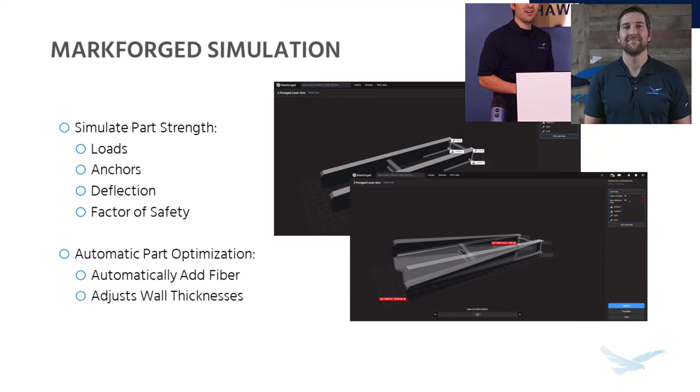So what essentially Markforged users have done in the past is print a part, test it, and find that maybe it's not strong enough, so it needs some additional material, or maybe it's too strong for its intended application, so it's just using excess material. So now with Markforged Simulation, you have a tool that will tell you before a part is even printed whether or not it's strong enough, and more importantly, it's going to give you options for adjusting print settings to meet your specific part requirements. Like you said, Kanan, I don't think I can stress enough how useful this software is and just how awesome its capabilities are.

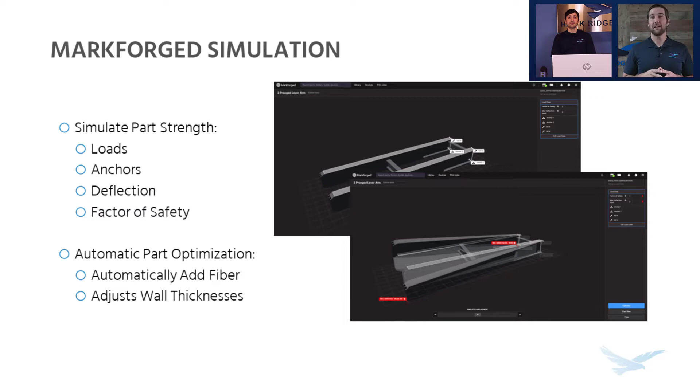That is pretty awesome. We can now predict how strong printed parts are, and not only that, but the software will also make changes to the part slice settings to make it strong enough for our intended applications. That's cool. I don't think I've seen that before anywhere else. And I know a few customers in particular who are going to be pumped for this new capability. So Jesse, can you tell us more details about how this software works, who will it be offered to, and maybe something about how our viewers can get their hands on it?

Yeah, absolutely. So at the moment, Markforged Simulation is a linear elastic solver, which essentially means it's going to predict how a 3D printed part will perform up until the point that it breaks, yields, or fails in some other way. And right now it works with both Onyx only parts and Onyx plus carbon fiber reinforcement. And what that means is users that have any of the Markforged plastic printers are going to be able to take advantage of simulation in one form or another.

And this one's going to be a fun statement that I probably won't get to make very often in my career, but as of the posting of this video on our YouTube channel, Markforged Simulation is live, and users can take advantage of it right now as part of a free trial that Markforged is going to run through April of 2023. So users have plenty of time to take advantage of it and simulate their parts. Hey, you gotta love those free trials.

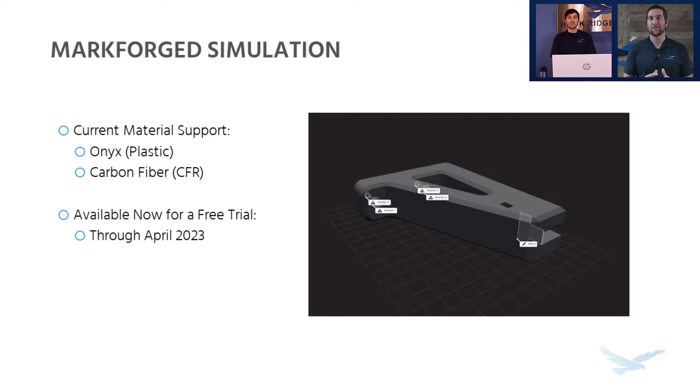So how can users access the actual simulation tool? Does it work with the current Eiger software, or is it a separate download? Yep, so since the Eiger slicer is all online, there's no need for software installs or any sort of updates. Simulation will work with all accounts, and it doesn't even matter how long you've had your account for.

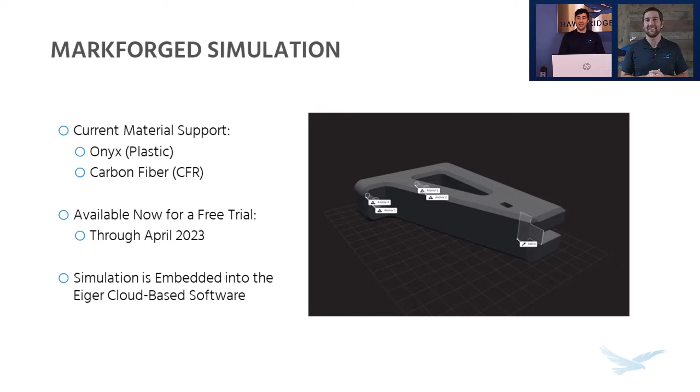So we do happen to have access to Markforged Simulation right now, and we've been testing it out. And so Jesse, could you give us a demo of the simulation software so our viewers can see how it works? Absolutely. Let's go ahead and jump right on into it so we can start showing how simulation works. So to get us going, I've already uploaded an end of arm gripper part and have it fully sliced. So as you can see in the lower right hand corner, it's fully ready to print. But rather than printing it, we're going to access simulation by clicking on the associated button.

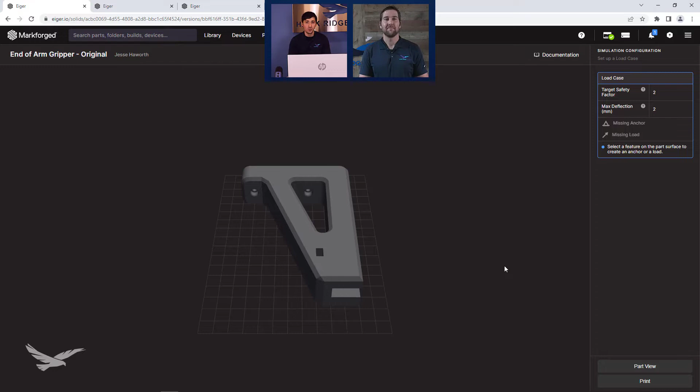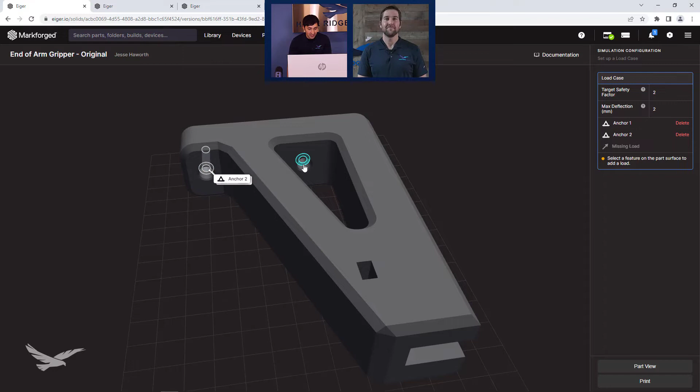And this is going to take us to the simulation configuration tool. So setting up conditions to run a simulation is actually really easy. All you need to do is set up at least one anchor to represent where the part is going to be remaining stable, and at least one load to show where the force against the part is going to be coming from. So for this particular part, I'm going to set up some anchors on these bolt holes here, and that's going to be representing where the part is going to be held in place while it's actually in use.

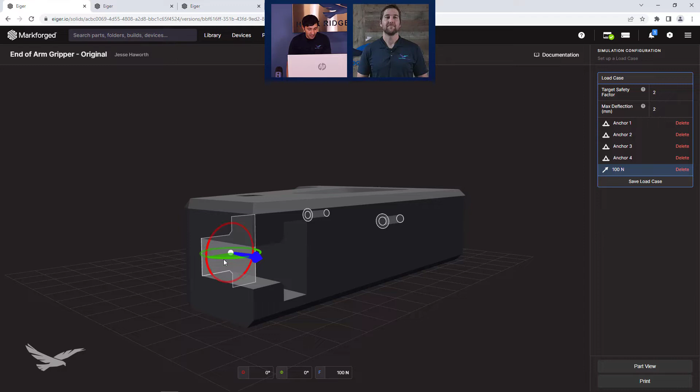And then I'm going to put the primary load surface against this one right here. And this is actually really cool because it's really easy to change the direction where the load is going to be coming from against a face. So I can use this widget right here to change the different locations of where it's coming from. You can be a little more accurate with the exact angles down below here in these boxes.

And then if I want to simply flip the direction that the load is coming from by 180 degrees, I can just click on this blue arrowhead, and now I have the direction that our force is coming from correct. And then what you can do as well is you can set the amount of force that's coming against that face here. So I'm going to set this to 100 newtons, and then once we have this in place, our part is all ready to be simulated.

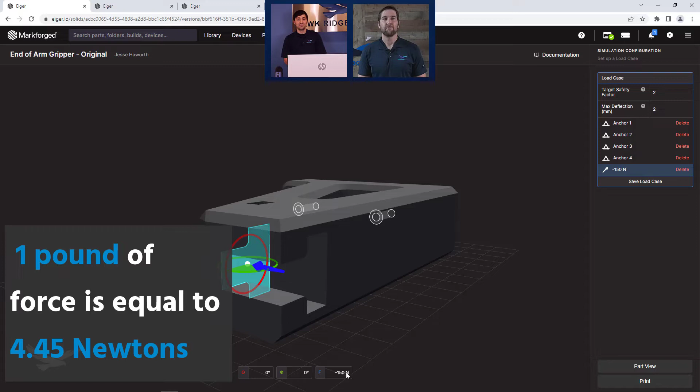Okay, so I see that anchors and loads have been applied, and that workflow looks very similar to what you would see on something like SolidWorks FEA analysis software, pretty simple. And so can you tell us more about the variables of factor of safety and deflection? Yeah, definitely. So we'll start with the first one you mentioned there with factor of safety. And in the context of the Markforged Simulation tool, this is going to be a multiplicative figure of how much load you want your part to withstand. So this is essentially, like it says, going to be a safety buffer.

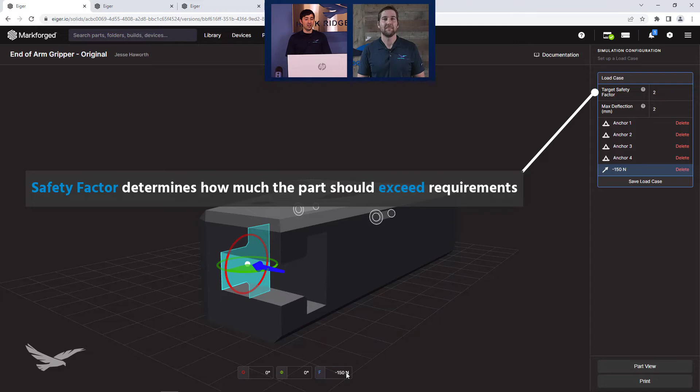For example, I have my expected load against our primary face to be 150 newtons, but the part might withstand more than that at some point during its life cycle. So with a safety factor of 2, that's going to set up the part to be generated and expected to withstand up to 300 newtons of force. And then max deflection is going to be pretty straightforward as well. This will simply be the maximum distance that we want our part to move or potentially deform while it's under load. So in general, this is going to be a low figure for stiff parts like that 2 millimeters that we have set now. Okay, cool.

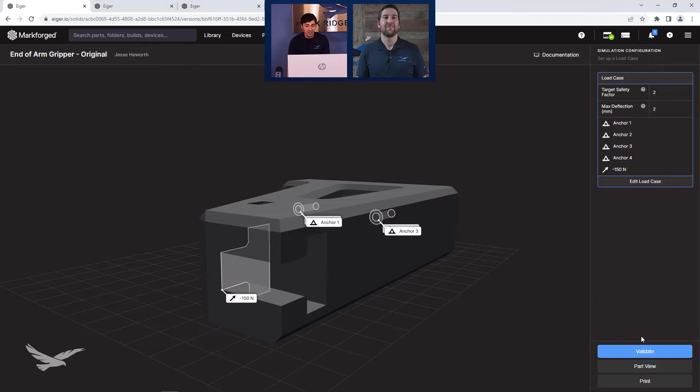So what is the next step after you've defined all your loading conditions? Yeah, so now we have our conditions in place. What we do is save our load case and then validate the part in the lower right-hand corner. And basically what that's going to do is take the current print settings that we have now and check whether or not they are going to meet the conditions we just set up. The validation doesn't usually take that much time, but what we're going to do is a little TV magic and jump to the end results.

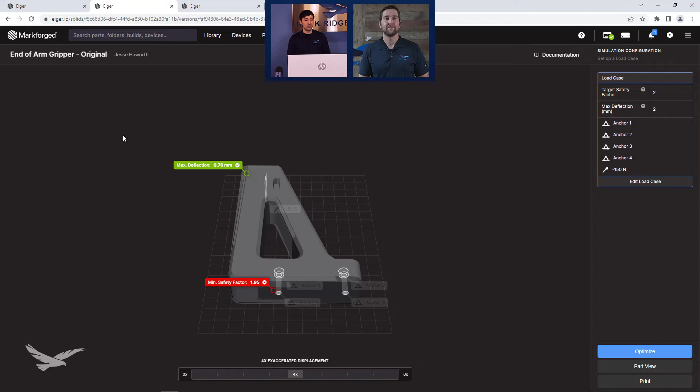And we can see that some areas of the part don't exactly meet the standards that we want. Though it doesn't really matter what results we get here, because now we have the option to run a simulation study with that optimize button down in the lower right. And that's going to see if there's a better way to print the part. So even if the settings that we have right now passed all of our expectations, there might be a better way to print it. So we'll do a little bit more TV magic and then jump to the end simulation results here.

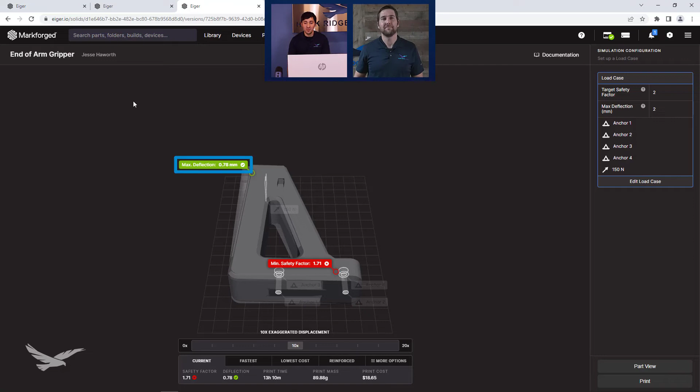So it looks like we have an overlay showing displacement with an expected amount of deflection, and it also shows an updated safety factor. Yes, exactly right. So after the simulation study, we get to see again how our current print would perform. So I can see that it actually does meet our deflection requirements, and 0.78 millimeters is a bit hard to see. So what you can do is you can use this exaggeration slider to check how the part would deflect and deform, if it will at all.

And unfortunately, the minimum safety factor that we have of 2 wasn't quite reached, but the tool actually does tell us how much force it will withstand based on the minimum safety factor that the part is expected to be.

So we have an idea of how the current part as it is sliced now will perform. So what can we do now to adjust that part to make it stronger? Yeah, so that'll actually be where our different optimization options come into play. So here, what the software has given us is the option for the fastest Onyx only print time for a part that will meet our conditions here. And then we also have a lowest cost Onyx only condition as well. And these are actually going to be the same settings for this particular part.

And then as we move further over here to the right, we actually have a carbon fiber reinforced version. And it actually prints 20% faster than even our original Onyx only version, and it deflects less at the same time as well. And then if we go over here to more options, we can see some more detailed results behind those configurations, such as print time, cost, and different layer heights.

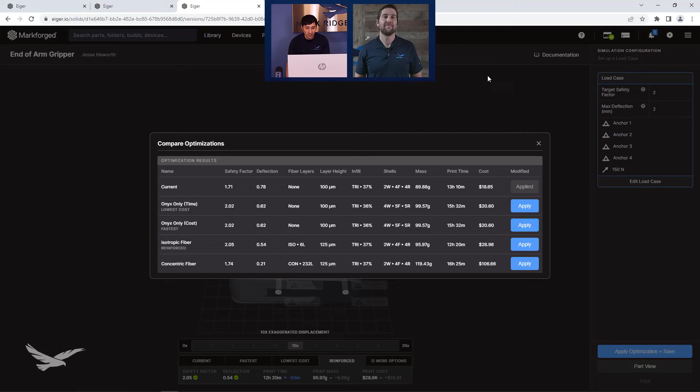Wow, so it looks like the software is automatically giving us options and choices based on what we think is important, whether that be cost or time or strength. And so what actually happens when we choose one of these options? Right, so once I've made my choice of what option I want, all I need to do is click on apply, and that will essentially reslice the part. And once the part is resliced, it'll be ready to print. And I'll switch over here to our final version with some carbon fiber included in it.

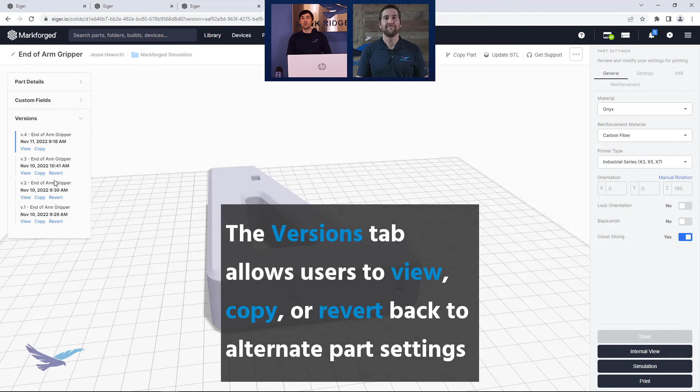And the cool thing about this optimization is you can do multiple different versions as well. And if you want to view a previous version, all you need to do is go over here to the versions tab and then click on either view or revert to a previous revision to see different results. So you don't need to import your file multiple times, run multiple simulations on it, have all of these different parts in your library. You can just run it once, and then if you want to go to a different revision and print that, you can.

So this second revision right here is where I have my different simulation results that we just showed. So if I wanted, I could just look at those results really quickly and then load up another optimized version. That's great. So one of the most common questions that I get from customers is, how do I know how much fiber to use? And so now we know the answer to that through predictive software based on their actual real world loading conditions. How cool is that?

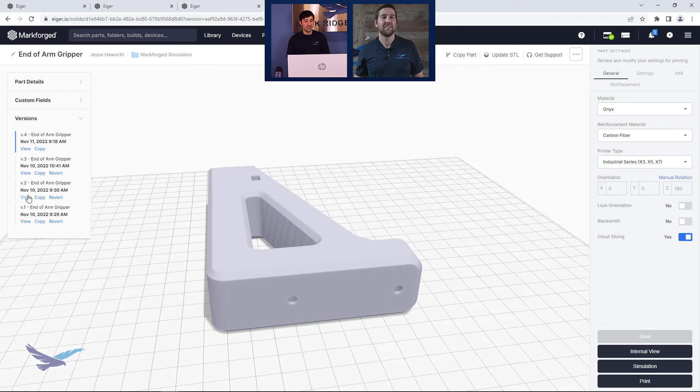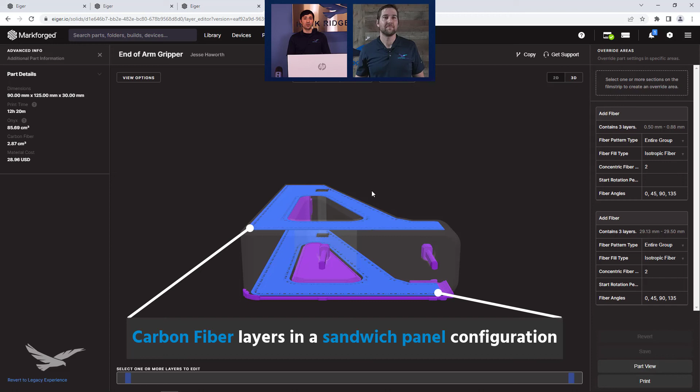Yeah, I'd say that's definitely one of the coolest things that I've seen in recent memory. So like you said, it's really been impossible to know exactly how much fiber to use in the past. And if you recall, when I first started out with this part, I didn't have any sort of fiber enabled. It was just an Onyx only part. So simulation gave me the choice to do an Onyx only variant if that was possible with the conditions that I set up. But it also gave me a carbon fiber inclusive version based on what my needs are with this part. And even things like wall thicknesses, different amounts of floor layers, different infills can be adjusted by the software. So it's really comprehensive in what it considers when performing a part study.

Thanks for showing us this demo, Jesse. This is awesome. So to recap, Markforged now has a simulation software embedded into Eiger that allows users to optimize part performance for real-world loading conditions. And then the software will make necessary changes for you in the slice settings automatically.